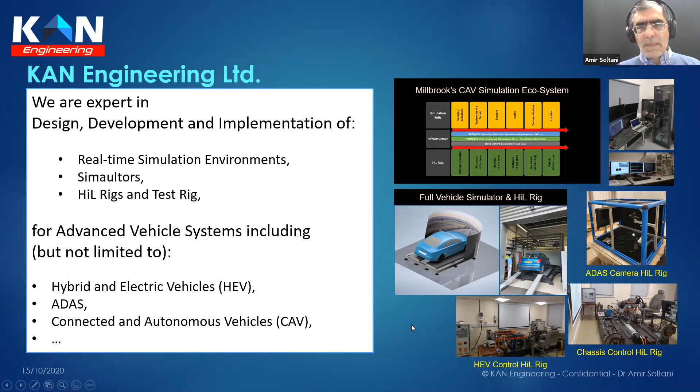Before KAN, I was working at Cranfield and designed and implemented several HIL rigs for hybrid electric vehicles, chassis control systems, brakes, power steering, etc. at Cranfield. These are some of the projects that I mentioned.

And this is one of the projects that we did at Millbrook. It's about the creation of the whole simulation environment. And this was the start of thinking of it as a kind of distributed simulation environment.

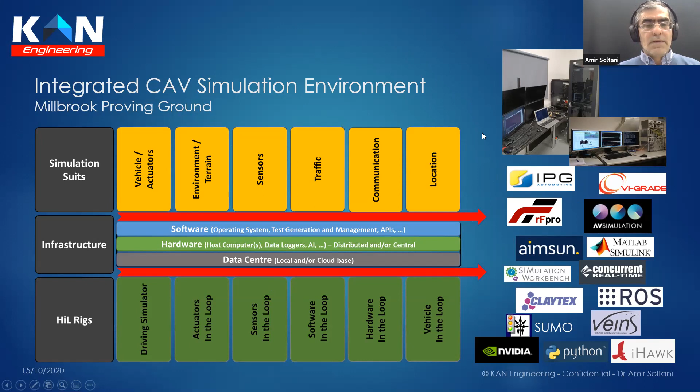And now we have, let's say, the most advanced simulation facilities in the UK for test and validation of autonomous vehicles and ADAS, including several HIL rigs and simulators, and a full vehicle simulator, all designed and implemented by our team internally, and a wide range of software is integrated with this facility,

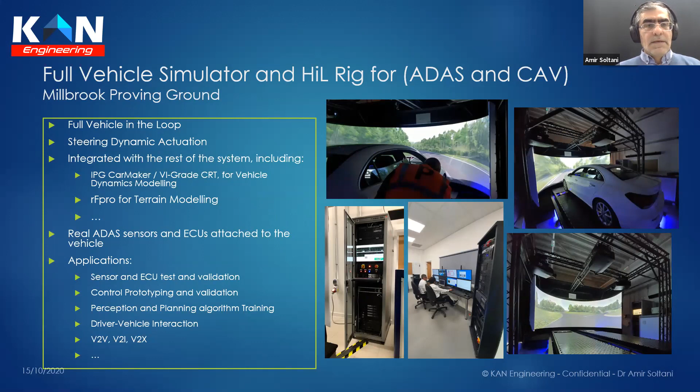and a range of HIL rigs for sensor in the loop and vehicle in the loop. There are so many other activities currently running at Millbrook.

Also, we were very privileged to be invited and engaged with this Zenzic project, which is kind of a continuation of our initial work at Millbrook. So now we extended our capabilities and expertise to cover other testbeds within the UK. I will go into some details of this project, and we are now at the final stage of this project.

We completed this project and demonstration, and hopefully you will join this event at the end of March. So we'll give you the full picture of this project, which is very exciting, and to some extent is unique in the world.

And the aim was to integrate three testbeds within the CAM Testbed UK, namely Millbrook, SMLL in London, and WMG in Coventry, to form a kind of distributed simulation environment. I will give you more detail later.

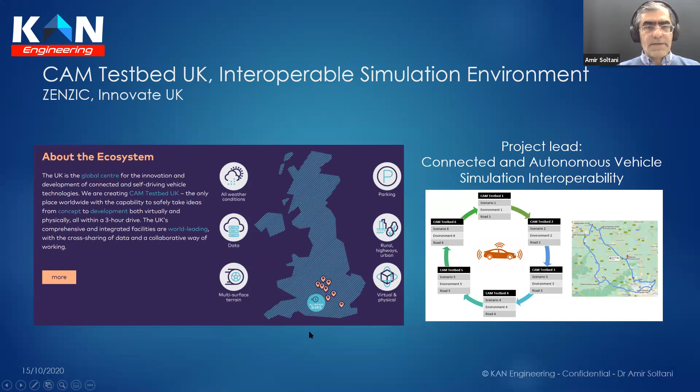Just recently, we were officially recognized as one of the CAM creators by Zenzic. So now we are part of the CAM testbed and considered one of the CAM creators, and have lots of contribution toward creation of the CAM testbed within the UK.

So, our vision is to be at the forefront of advanced simulation technologies and become one of the global leaders in this market, and create strong and long-lasting relations with the top companies, OEM companies, and test centers within the UK and globally.

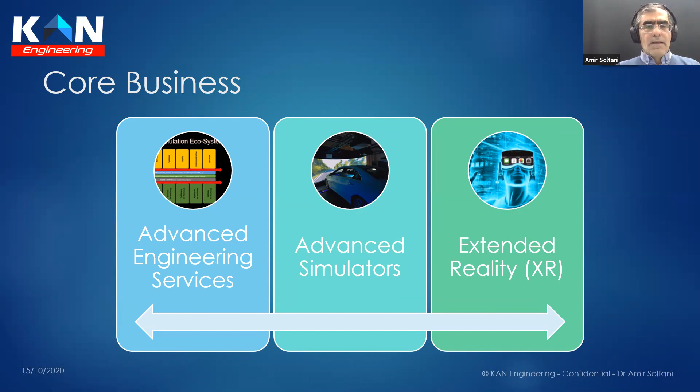The area that we are currently covering is more about advanced simulation services and simulators. Also, we started to look at some new capabilities, including extended reality, VR, XR, and so on, to include in this simulation domain. So this is a very quick introduction about the company and myself.

But the main topic of this presentation is interoperable simulation. So, what is an interoperable simulation? I will try to start from the very beginning, step by step. We'll go through the concept of interoperable simulation and distributed simulation and why it is important. And we do believe that this is the future trend in the simulation domain, especially for connected autonomous vehicles.

So this is more about having a kind of systemic or systematic approach toward simulation. So in this concept, we try to look at the simulation as a service, as a system, and more widely as a system of systems, and try to create a kind of ecosystem for the simulation.

So if you know about simulation and this domain, there are lots of words and lots of areas, tools and concepts involved, from driver in the loop and driver behavior, vehicle dynamics, actuator dynamics, sensor models, localization, environment, etc. And there are lots of algorithms involved, for example, for control, perception, localization,

and in terms of the real-time tool chain and the rigs, for example, vehicle in the loop, hardware in the loop, sensor in the loop, etc. So these are just a few of the domains and topics involved within simulation, and it's a truly complex and comprehensive domain. So from the beginning, it looks very complex, and it's very hard to cover everything.

So we try to apply some kind of system engineering concept to approach this complex environment, because without this you get lost, because there are lots of things involved in this domain, and normally it's very confusing. You know, which tool, which simulation tool, which software, which approach should we apply and utilize for our simulation task. So there is so much background required to understand this,

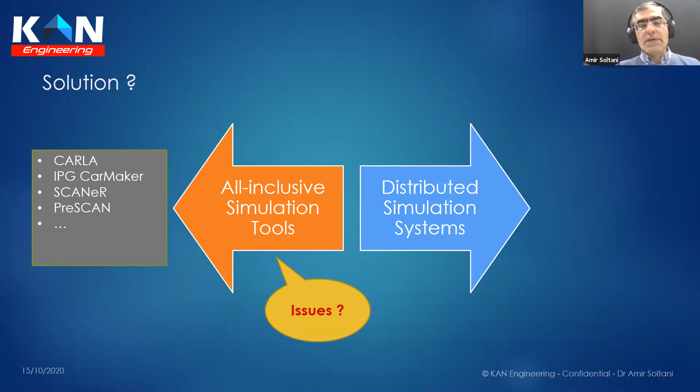So the main issues with this software are the lack of flexibility in terms of fidelity and complexity of the system, and the detail, accuracy and reliability to cover all the areas related to CAV simulation. So the other approach that we propose is distributed simulation, and this is fundamentally different from all-inclusive simulation tools, in that we accept that there is no unique software tool that can cover the whole requirement for simulation, from offline simulation to real-time simulation to hardware-in-the-loop simulation.

So we try to provide a systemic approach to simulation, and try to cover the competency and strength of each of these tools by providing the infrastructure and environment to integrate them. You can integrate different tools together for a specific task. And we are among the first companies to propose this approach, but there are other companies like AVL, like Porsche Engineering, and recently in the US a new project started with the same concept.

And it might be of interest to you that this concept, called interoperable simulation, has been widely acknowledged and addressed for many years in the defense industry and aerospace, but in automotive this is new. In defense there is a wide range of activities done in this domain, but the requirements of automotive are a bit different. For example, in defense there is a hierarchy where you can define the system from top down and define all the standards, and everybody should obey these rules and standards.

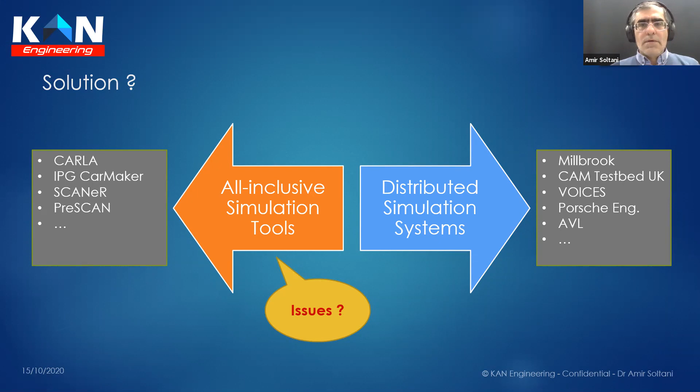So just for your understanding of what we mean by distributed or interoperable simulation, I prepared some slides starting from a very simple concept and then step by step going into the details. So to begin with, if you look at an autonomous vehicle, it involves a vehicle, sensors, some algorithms, etc. And the vehicle interacts with the environment, with traffic, with other vehicles or pedestrians, etc., in a way that it should work as a closed loop.

From the systemic point of view, we should look at this as a system that includes traffic vehicles and other objects around the ego vehicle. The ego vehicle is the center, and the other actors will interact with it. The self-driving vehicle should see, perceive, and make decisions and react, and the traffic will react according to the ego vehicle's maneuver.

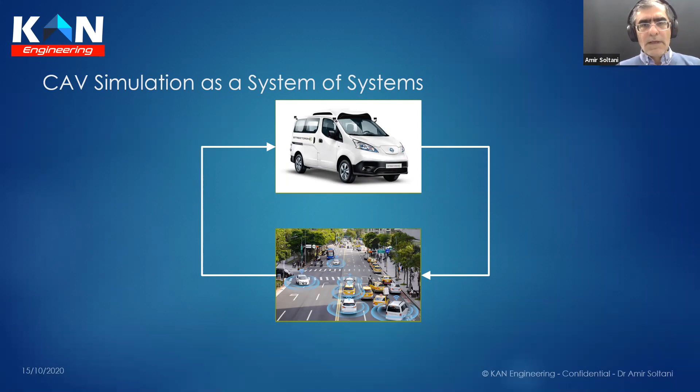As a first step, we should divide the ego vehicle and environment into two subsystems of the bigger system. So at the first step, we have an ego vehicle and the environment or surroundings.

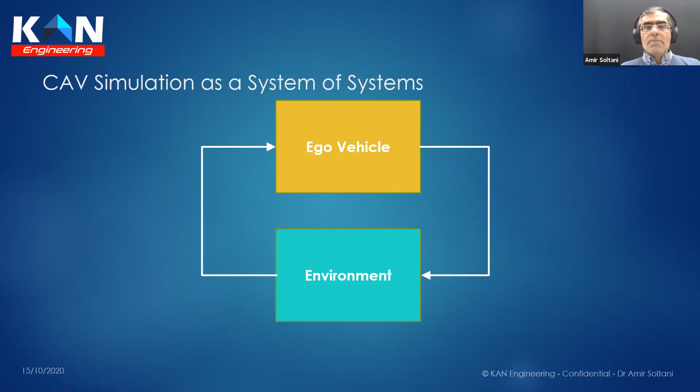But inside the ego vehicle, we have a range of subsystems within the ego vehicle subsystem. For example, we have a range of sensors, autonomous driving software, actuators, and vehicle dynamics interacting with the environment.

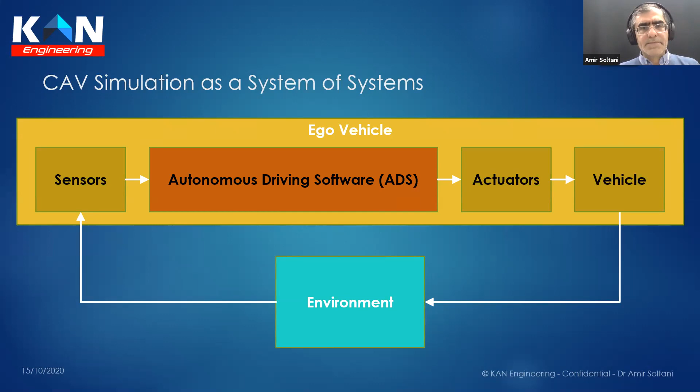Going one step further, for the sensors, we have a range attached to the ego vehicle, like camera, lidar, radar, proximity sensor, connectivity and antenna, and GPS. For the autonomous driving software, we have a lot of algorithms for sensor fusion, perception, localization, planning, decision, and control, just to name a few.

For the actuators, the main ones working for autonomous driving are steering, brake, and powertrain, and the vehicle itself, including chassis, tires, suspension, and so on. So by this view, we see that the ego vehicle itself is a system with lots of subsystems inside, and the whole is considered a system of systems.

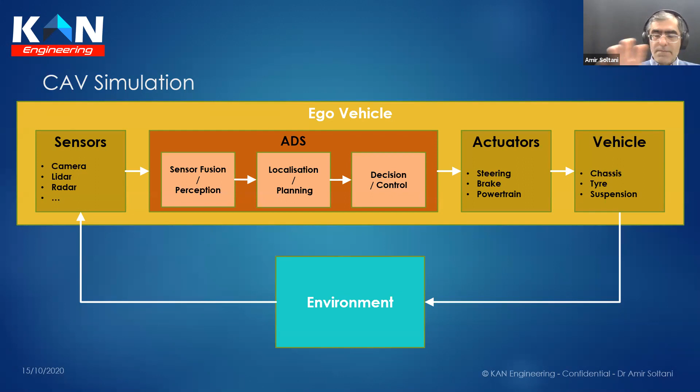Again, for the environment, we have other subsystems, for example rain, fog, daytime, etc., terrain, street furniture, road, traffic, objects, pedestrians, etc. So again, the environment itself is a system including several subsystems.

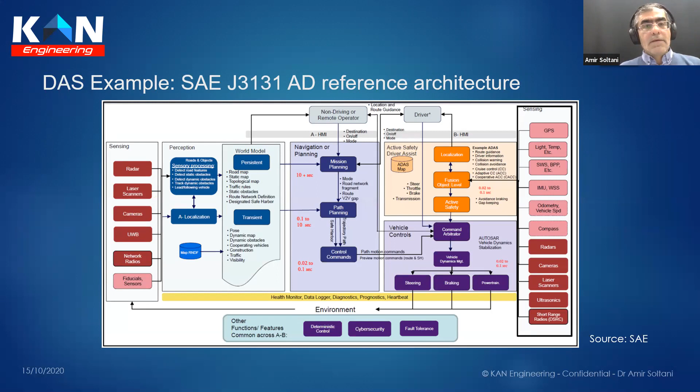Also, we have to look at the development process as a kind of V-cycle, and consider that we need different levels of fidelity and complexity and detail for each development stage. At the earliest stage, we need very low fidelity models, more of a system view. But when you go into detail, we need high fidelity modeling and simulation tools, and when we want to implement this, we need hardware in the loop, software in the loop, and so on, to validate the system we design.

So by that understanding, we see this is not a linear relation between these systems and the development process. The system needs to be specified and orchestrated in a way that considers the development process as well, and we have to understand which simulation tool is suitable for which stage of development.

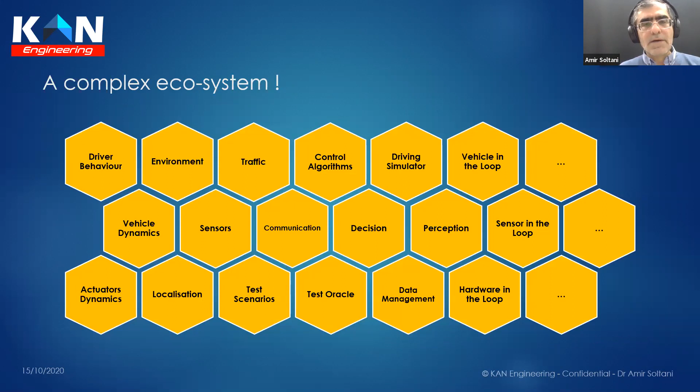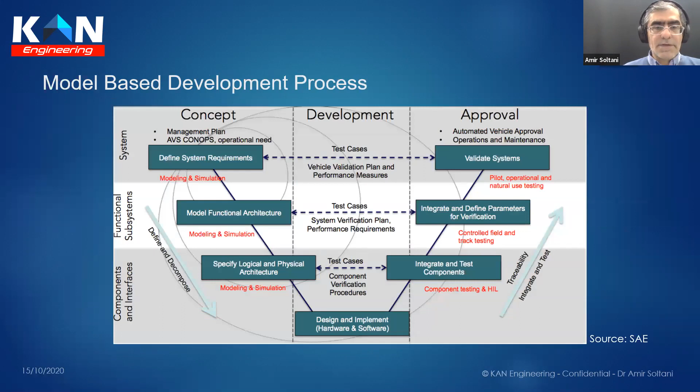So again, we understood that this is a complex system, but we can define it in a systematic way. We can decompose this system into subsystems and define a proper tool set suitable for each development stage. This is the main concept of interoperable simulation.

Also, we have to consider another factor, the role of the test center and the developers. As a test center, we normally don't consider the details of the autonomous driving system, because that's the task of the system developers, OEMs, or tier 1 companies that develop algorithms or software for autonomous driving. So we have to separate the autonomous driving software, system, and functions from the rest of the system.

This is the beginning of designing an interoperable simulation. We separate the autonomous driving software as a kind of black box or gray box, because we don't want to know the details due to IP protection and confidentiality. Companies are normally very sensitive about disclosing this part. So we look at this as a black box.

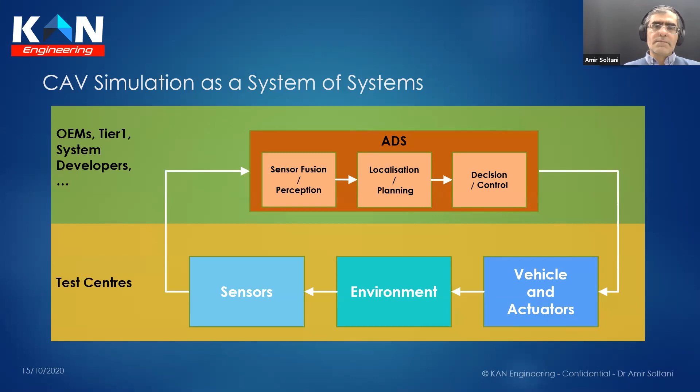So, when we look at the blocks in the lower block, there are a wide range of tools available that are very good, for example, on vehicle dynamics and sensor, terrain, environment modeling, traffic modeling, communication, localization, etc. And we have to understand the capabilities of each of these tools and mix and match these software tools to cover the simulation task based on the development process.

So as you may imagine, designing this kind of distributed simulation required a very detailed understanding of the capabilities of these simulation tools and how to utilize and integrate these tools to come up with your own setup.

Okay, so with this introduction, this is exactly the same concept that we applied at Millbrook, and we now have a very comprehensive set of simulation tools and infrastructure, and the architecture and middleware to integrate and glue all this together in a very flexible way. I'm not going into much detail about the Millbrook capabilities, but if you want...

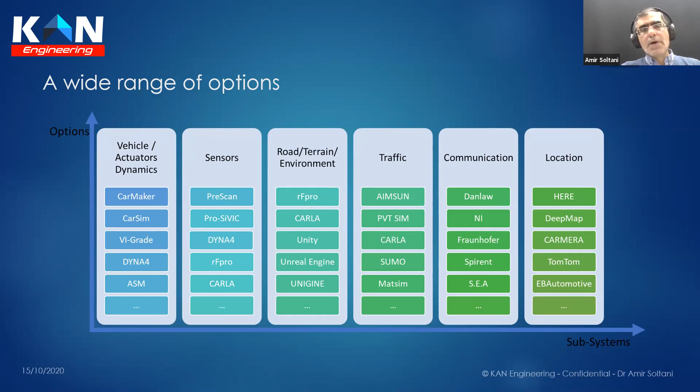Okay, so I'm going to give you some overview about how we applied this concept for this Zenzic project.

So we have been invited to participate in a kind of initial phase of understanding the capabilities of different testbeds within the CAM Testbed UK a few months ago.

This project was initiated by Zenzic, and Zenzic is a kind of acting body under the umbrella of CCAV and Innovate UK. So the government funds and activities within the CAM and CAV domain, and more specifically for CAM testbeds, are governed and orchestrated by Zenzic. There's also a Zenzic roadmap for the UK 2030, and I can link you to Zenzic to run a presentation about the CAM roadmap, which defines the whole activities and roadmap of connected autonomous vehicle development within the UK over the next 10 years.

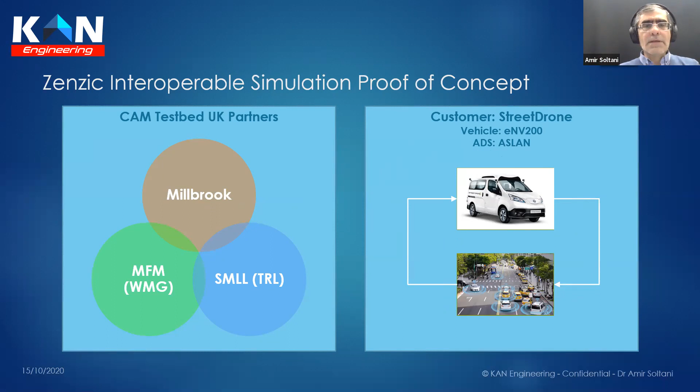So again, using the same concept as I mentioned, we started to look at the whole system, and this is the architecture that we proposed. On top there are autonomous driving software and functions within Aslan, and then there are subsystems for actuator dynamics, vehicle dynamics, then it linked to road and terrain and environment, and then it linked to sensor.

And the sensor output will feed to perception. Also, we wanted to include traffic model into this, and demonstrate some capabilities of injecting live traffic data from a software owned by TRL, that has some capability to link with the live traffic signals at London Road with this simulation environment. And the environment we wanted to run was the area and streets around SMLL in London.

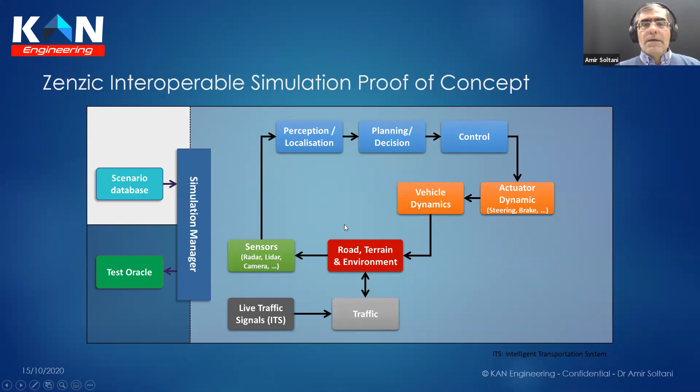So based on this concept, and these designs based on the capabilities identified within the CAM testbed between these three partners, we started to decompose the system into AD function - ego vehicle, modeling and simulation, sensor and environment modeling and simulation, traffic and intelligent transport system modeling and simulation, pre-processing as a test scenario database, and post-processing, and a kind of interface to link the scenario into the simulation and define all the simulation parameters seamlessly.

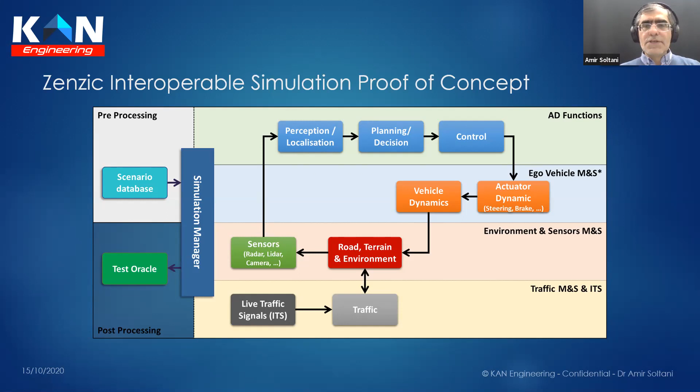So based on this decomposition, we then define this into two domains, which is the one on top is the customer domain, and the bottom is the CAM testbed domain, similar to the base concept that I mentioned. So we try to create the whole simulation capabilities across the CAM testbed in the lower part of this table, and the upper part is the autonomous driving function and software, which is Aslan.

And the software that we selected for this proof of concept was to use IPG for the vehicle dynamics and the actuator dynamics, rFpro for the terrain, road, and environment modeling, LiDAR sensor from Claytex, VISSIM for traffic modeling, and SCOOT, which is the live traffic signal integrated with VISSIM, and use the SMLL environment model in rFpro.

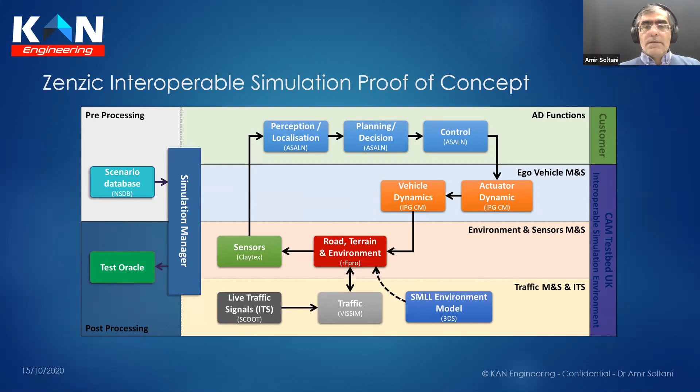So the next step is to distribute these capabilities across the testbed partners, and we run two different configurations. One configuration was a distributed simulation between Millbrook and SMLL. So the Aslan was the responsibility of the customer, and vehicle dynamics, environment, and sensor covered by Millbrook, and the traffic modeling and simulation and the live traffic data by SMLL.

And also the scenario database, national scenario database owned by WMG. We define the scenario at the WMG database and retrieve this remotely.

So, as you can see, the arrow between SMLL and Millbrook means there is not a local connection; it's a distributed connection. So the bottom area is located in London, and the middle area is in Millbrook, and we established connectivity between these two locations. So some part of this simulation is running in London, some part in Millbrook, and part of this in WMG Coventry.

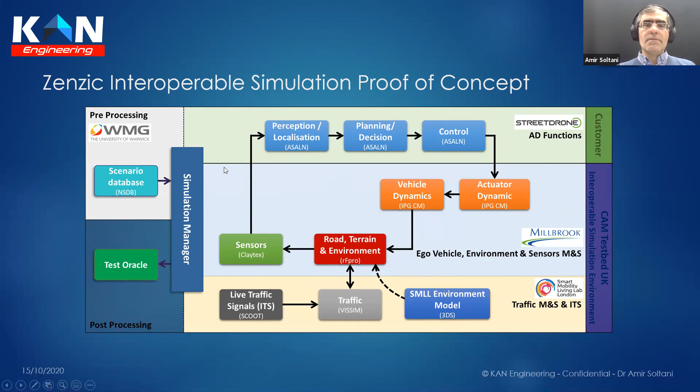This is one setup that we designed and implemented. The other setup that we ran with WMG was to use the same scenario and use case and function, but with different architecture and different tool sets. For example, in the WMG setup, we use the vehicle model inside rFpro and the road and terrain from rFpro again, but the traffic model simulation using Sumo, and the sensor again Claytex.

So you can see there are some similarities, but there is also difference between these two architectures, and the whole simulation again in a distributed way, but the whole simulation was running at WMG. So there was no connectivity in terms of the real-time simulation between WMG and the rest. So I will give you the reason why we selected these different configurations and what we want to demonstrate.

Also, as part of this activity, we developed a kind of simulation manager. So we can get the simulation scenario data, and based on the scenario file using SDL language, we set the whole simulation parameters seamlessly. And this is very, very important because when you want to run this in a closed loop manner, and you want to run, for example, millions of simulations with a variety of scenarios, you can't run this and set everything by hand. It's not possible. So you need some kind of interface and supervisory software to set everything based on the defined scenario.

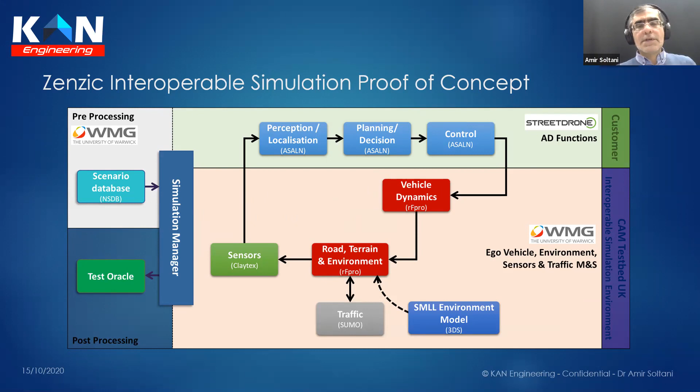And one of the goals of this project was to define and propose a simulation architecture that enables future expansion in terms of the flexibility, expandability, and modularity of the architecture, to have a flexible environment based on different use case, configuration and combination. So as part of this project, we also worked on the simulation architecture.

Traditionally, because interoperable simulation and distributed simulation was not a main concern within the automotive domain, there were no activities in terms of defining a proper architecture for distributed simulation. Normally the solutions available within the automotive domain are based on local APIs or FMI/FMU type connections and glue between different softwares.

But the main challenge and limitation of this ad hoc integration, or point-to-point or pairwise integration, is that if we increase the system complexity and the number of subsystems, we end up with a very complicated architecture where it's almost impossible to add more future subsystems and features. And if you want to change this, it's very hard or almost impossible. So it's not expandable.

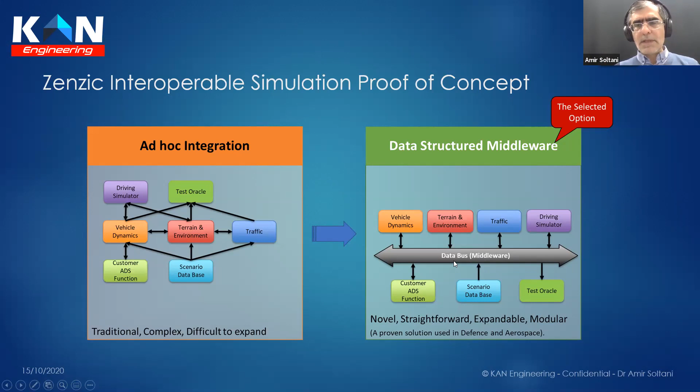These systems also work integrated with others, for example, vSim integrated with ITS SCOOT TRL to feed the real traffic light signal data. Also, rFpro at Millbrook is linked with a vehicle simulator, and at WMG is linked to their own 360-degree simulator. And from Aslan, we connected this software to the real vehicle.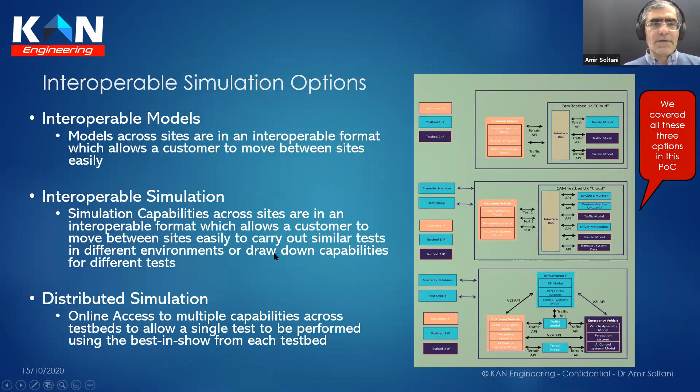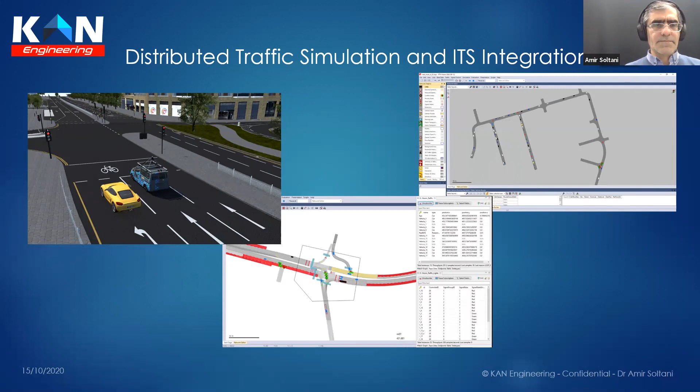And we ran different scenarios, and as I said, the scenario was defined, as some examples, using SDL language, and the SDL file was uploaded to the National Scenario Database in WMG Coventry, and we used this scenario in Millbrook to set up the whole simulation. So the scenario file is located somewhere else,

and this KAN Sim Manager was able to define the whole simulation parameters, including the ego vehicle, pedestrians, how they are triggered, how they behave and react, and so on, all linked to rFpro for the environment, the vehicle model from IPG, and also to Aslan for example for perception or planning or object detection, etc.

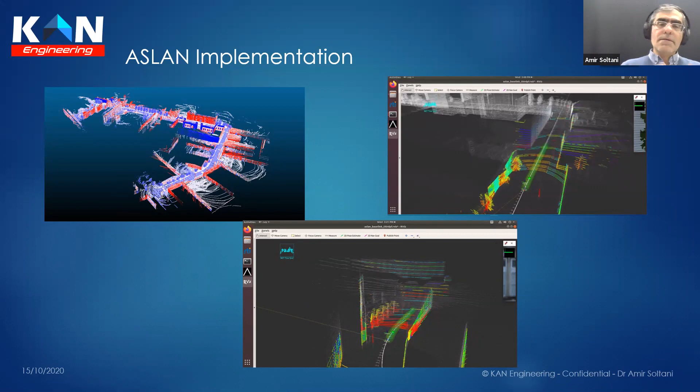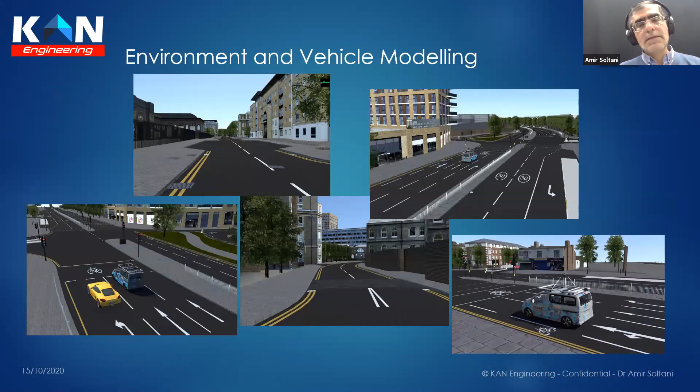The more interesting part is that the whole simulation is done in a distributed way, in an interoperable way, with lots of software involved working together to achieve these results. And this is a truly first class, world class implementation, system and architecture that opens up lots of new capabilities and possibilities to include other software, tool chains, simulators, HIL rigs, etc. into the system.

I didn't include it, but we also linked the whole architecture, the simulation setup, to the real vehicle at Millbrook using the Millbrook vehicle simulator, and would also replicate this in the vehicle simulator at WMG. So it's not just about desktop simulation, but also includes the vehicle in the simulator and vehicle in the loop. Yeah, so that's it. Any questions?

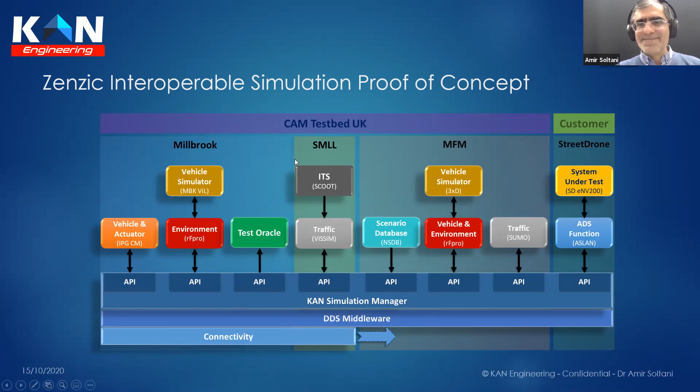Thank you so much, Dr. Soltani. I think the presentation was very pictorial and detailed, because at least for me this was a new topic, and I think I have a basic idea of it. So thank you so much. I perfectly agree. I found it really interesting, and I never imagined this kind of approach to simulations. I think it's something completely new, and it's been very interesting to see how distributed simulation can be performed. So thank you very much from my side.

You're welcome. You're welcome. We can drop questions in the chat. Sorry, I can't see the chat. Can I close this share so I can see the chat box?

Okay. So before somebody does it, I'll ask my question. You mentioned how rFpro can be used to simulate the environment. So there are a few things which are basically physical, like the temperature, or if it's raining. So are those detected by the sensors and then fed into rFpro and then simulated?